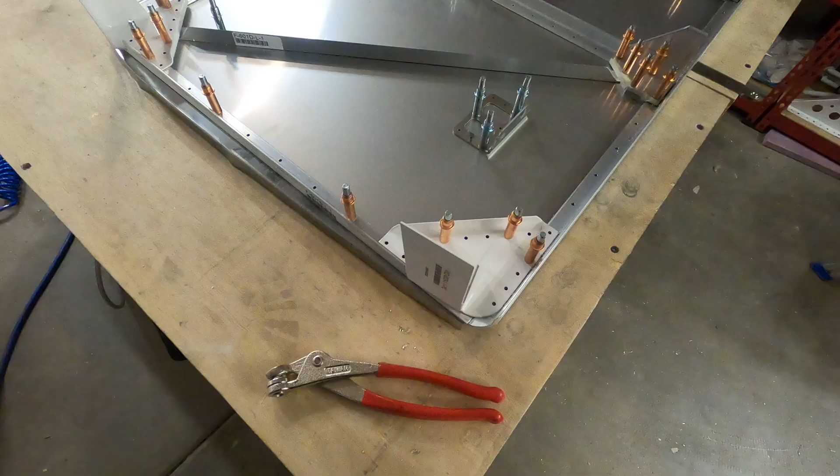All right, back to the Firewall. Let's see how far we can get on this thing. To start, disassembly, deburring, as always, and a lot of dimpling and countersinking.

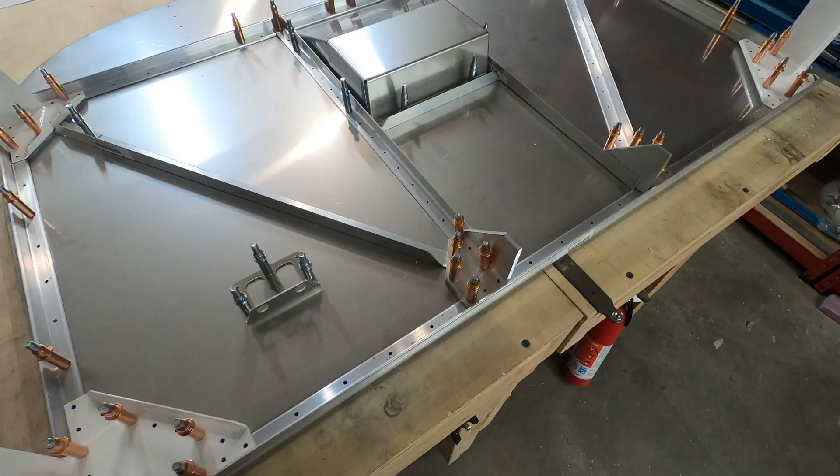Once that's done, we will get into the primer. Again, we're using that new white primer. I'm excited to get a little more experience with that. And once that's cured, all this goes back together and we start riveting. Let's do it.

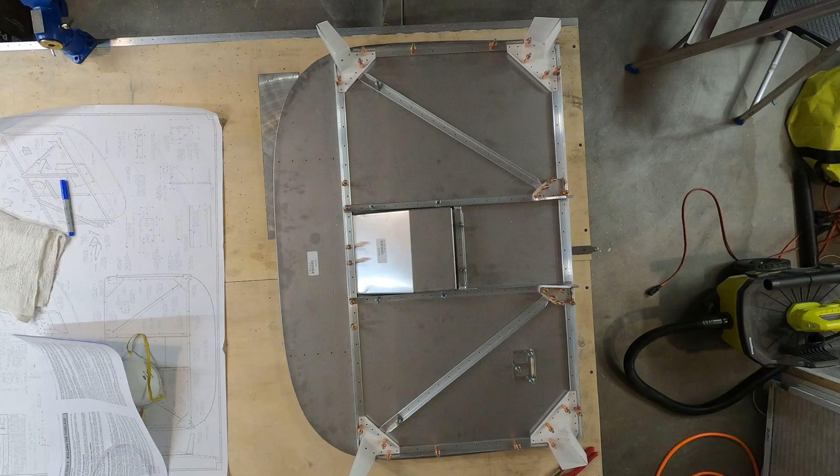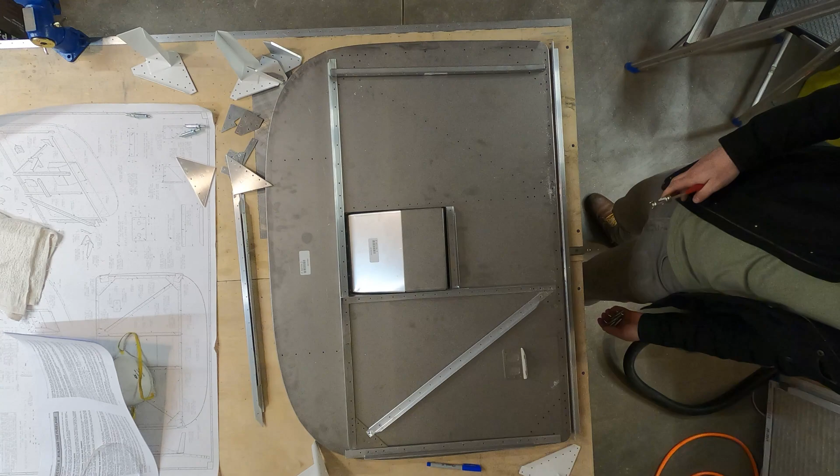I got the Firewall deburred just fine. It is steel, so a couple extra twists and a little extra pressure with that tool are necessary.

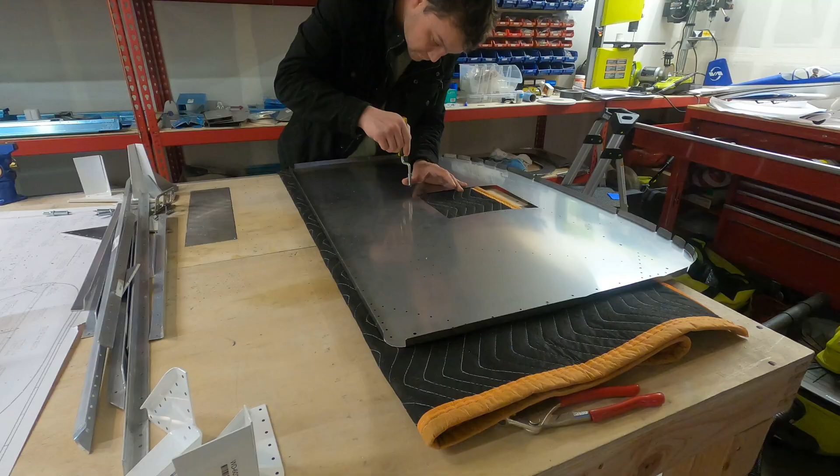And then from there, it's dimpling. Now, I'm really happy I took some time in between the wings and the fuselage to rebuild my dimpling bench. The added structure helps support some of the heavier pieces, which with a steel Firewall is really necessary. And then one of the things that I did on my original one, not knowing, is I put some legs out front, but the dimpler itself is designed to hang over a bench.

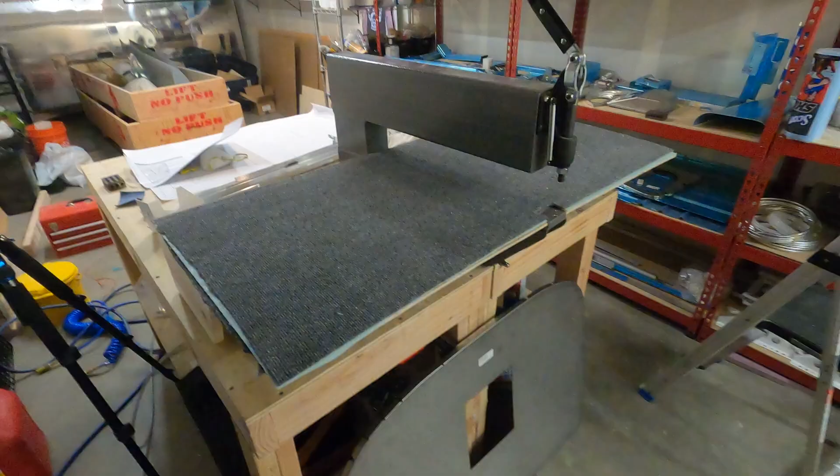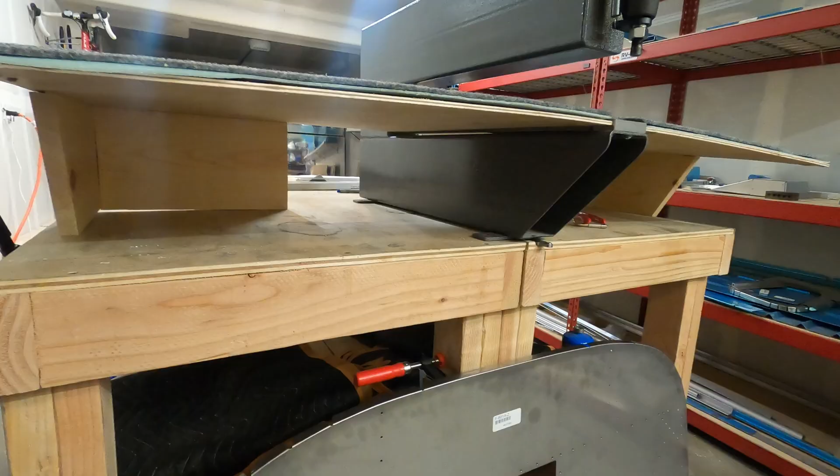So that you can get into parts that are folded, like trailing and leading edges. And so often those two front legs were just dangling off the edge of the table. So the new model is mainly supported from the back with an angled cut, allowing the front to kind of hang over along with the dimpler. It works wonders. I'm so happy I took some time to do that.

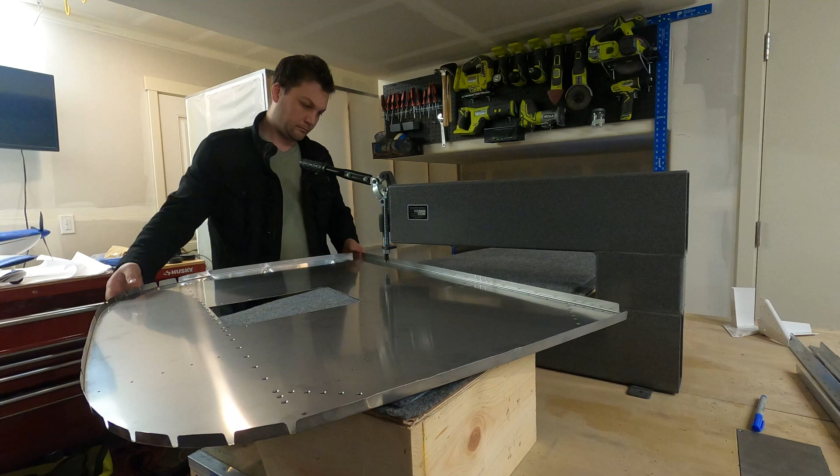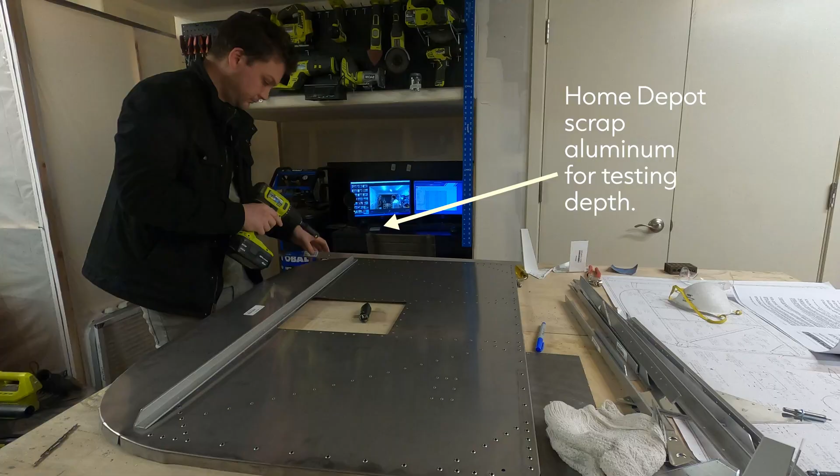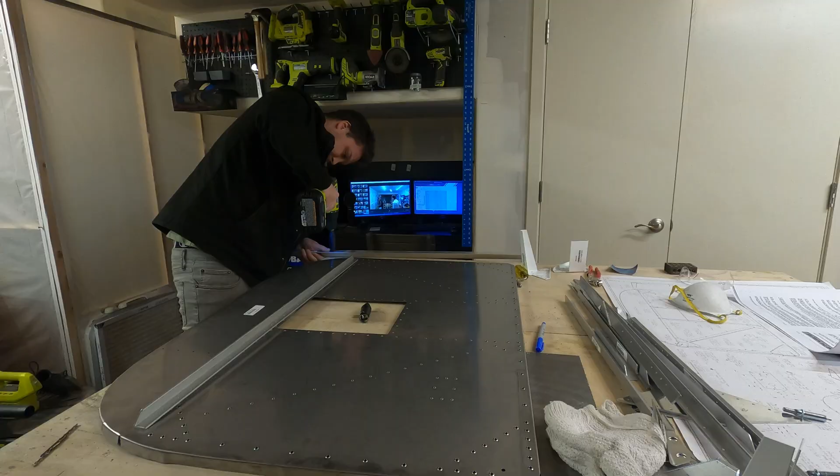Once dimpled, it's all countersinking. So I got my two countersink tools set up, the number 40 and the number 30. They're set for flush rivet depth, then 7 clicks deeper, and that's going to be perfect for nesting into the dimpled Firewall. So running the dimples, being careful that you're getting the dimple on the correct side of the part, all through the stiffeners, all through the doublers. And that's going to get everything right up to the point of deburring.

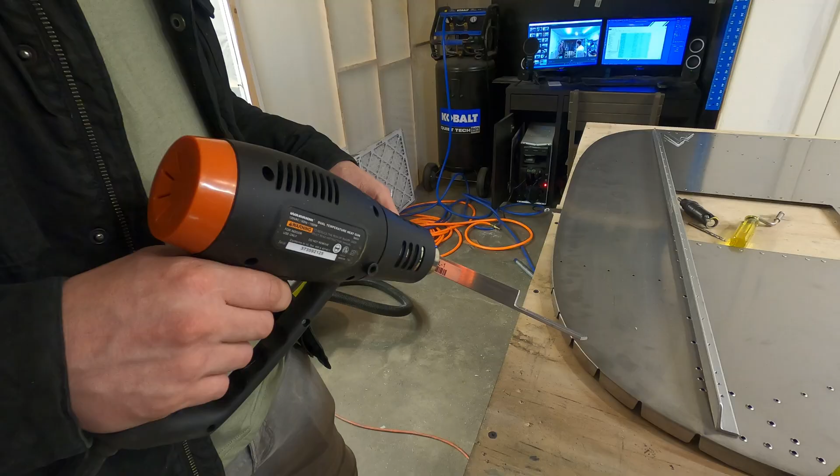So the heat gun trick works pretty well for getting these decals off. The heat gun trick is simply hit it with a heat gun until, I like to do it, until the heat activated paper turns the whole thing black, and then peel it off. It gets the decal, the part label off much easier than trying to pick at it and have it come off in a billion pieces.

These came out really cool. These are nice looking parts, and I'm proud of them.

Shooting the primer, I'm getting used to the stuff. I like it. I like how it comes out of the gun. I like how it applies. The drying time is going to be an issue, I can already tell. It has the potential to really log jam me in the primer booth. That's okay. I think with the fuselage, there's enough stuff that you can bounce around on. Hopefully, I'm not really ever waiting on parts to dry.

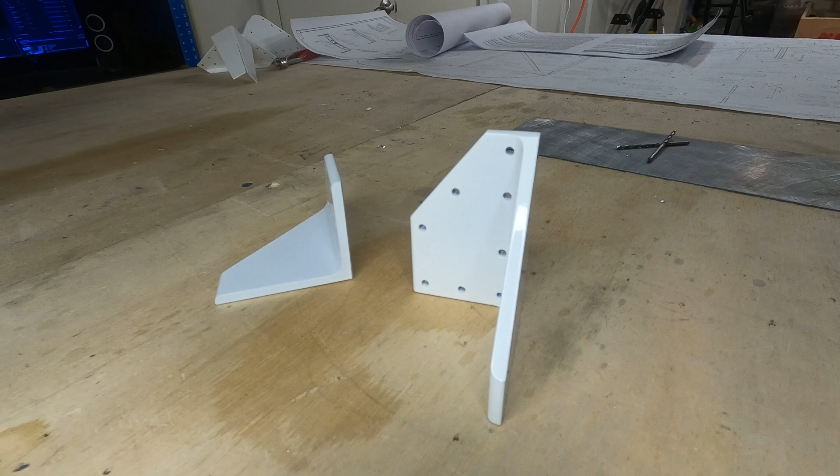The wait is long. The dry time is longer than I would like, but the finish is excellent. It's exactly what I want the interior of my plane to look like. I took a little extra care on those pieces that I was so proud of fabricating, making sure that they got a nice coat, 2 coats, and they came out just wonderful. It looks amazing. So I'll take the hit on having to slow down at points, and it'll definitely try my patience, but I really, really, really like the finish.

Now it's just rivet everything together. The instructions make it sound pretty easy, but I have a feeling it's going to take me a little while. Let's get started.

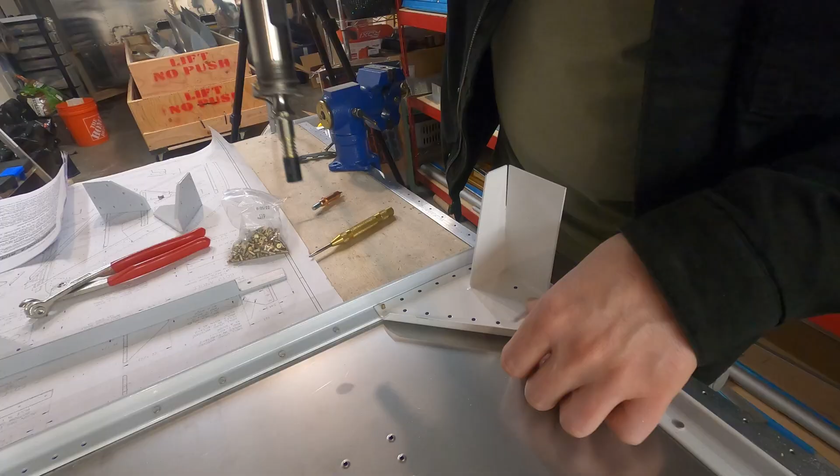So when I started the firewall riveting, I was all about back riveting. Even though I had read somewhere that it's much easier to buck them, I was like, nah, forget it. Bust out the back rivet plate, let's get it going. After about a dozen rivets, half of those having to be drilled out, I gave up on back riveting. I don't know why, it's just difficult, and the rivets have a tendency to sit high.

Once I started traditional bucking rivets, they sit flush on the firewall side. They look great on the other side. There's a couple angles that are hard to get to, but for the most part, just buck those rivets, man. Start with your 4s. They're a little bit difficult, but once you get in a rhythm, you bust through them. And then when you get to the 3s, it's just easy. It's a great way to finish up. Make sure you do whatever you have to do to remember not to set any rivets around the recess.

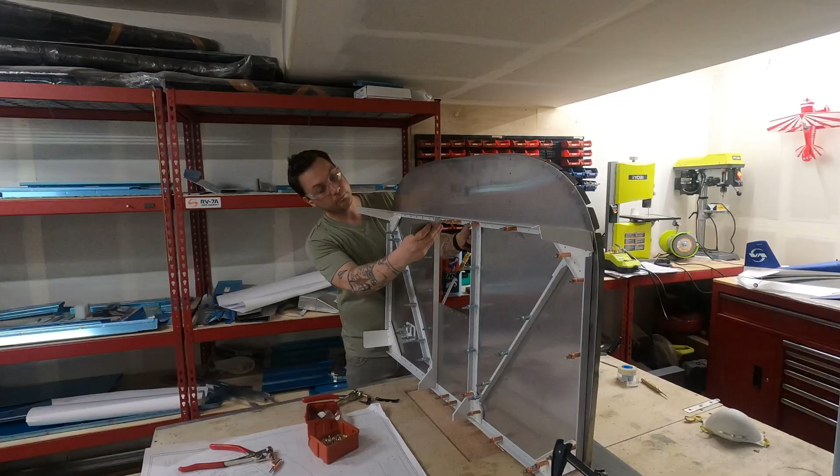This is why I always use the blue tape when I don't want to rivet something. I just caught myself having already set the top line of rivets where the recess goes. Those are all supposed to be left out until you rivet in the recess. So I had to drill out some rivets, but we're gonna keep plugging away.

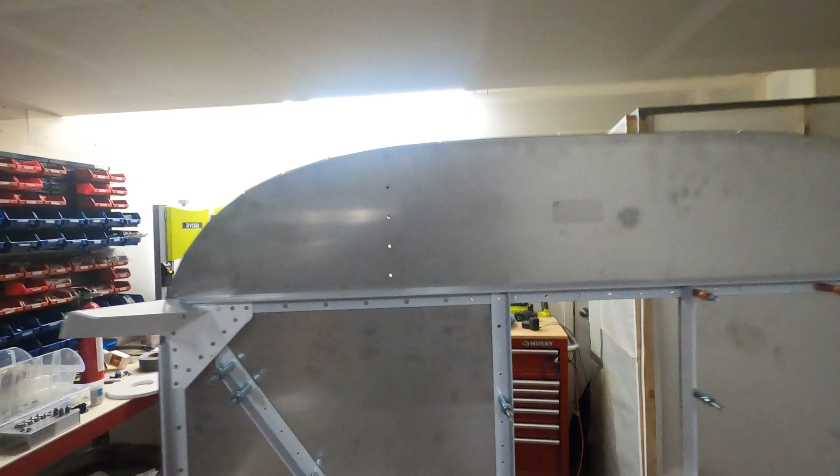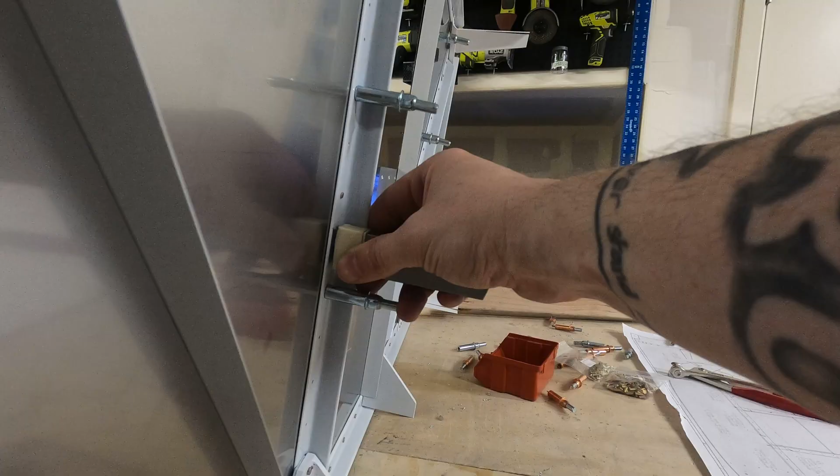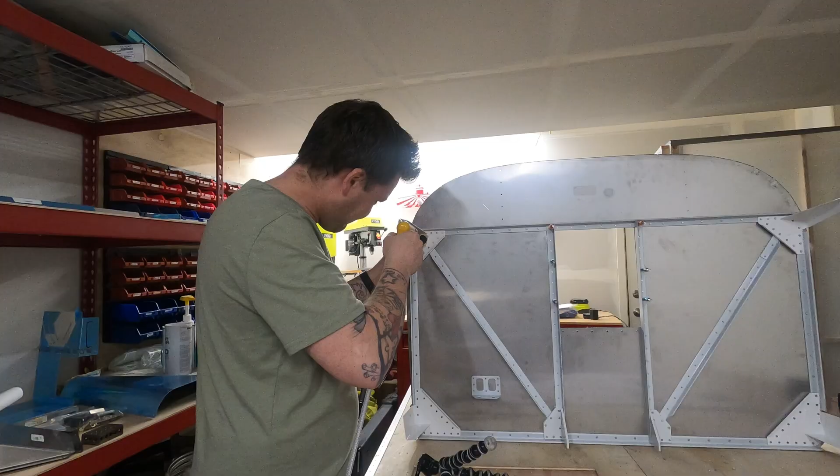The very last thing on the firewall for now is drilling 2 holes for the motor mount. There's already an existing hole in the bracket up front, and there's an existing hole in the firewall on the back. We're just trying to connect those two. If you don't hit it exactly perpendicular, you're not going to come through on that hole on the firewall.

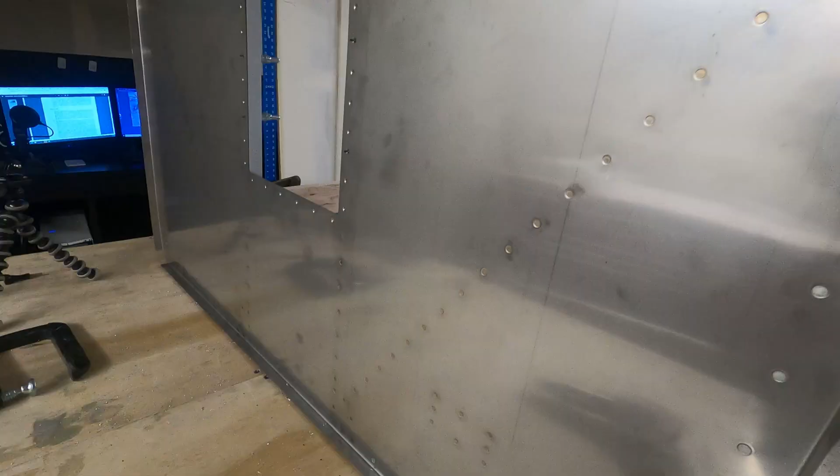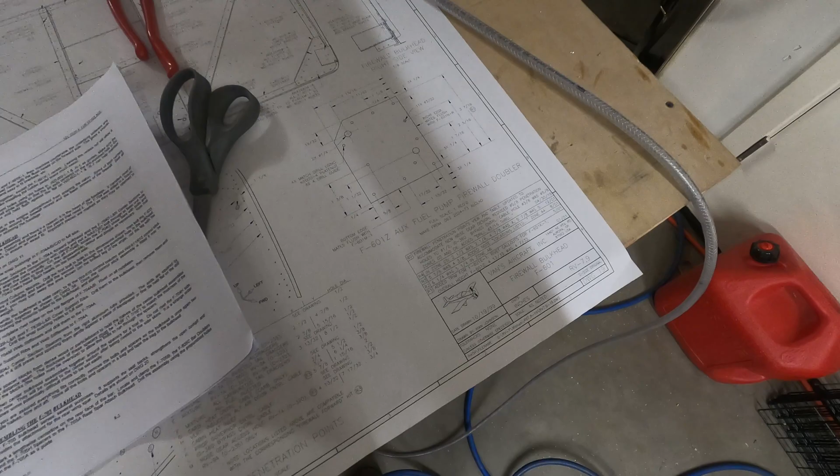You may be asking, what about that auxiliary fuel pump doubler, the piece that I couldn't find because I have to make it? Well, I was never too worried about that. The reason is, I don't think I'm gonna mount my auxiliary fuel pump to the firewall. There's quite a few very popular ones that get mounted between the left and right seat in the center console next to the fuel selector switch. In fact, I've sort of always known that that's where mine is going to live. So for now, no doubler on the firewall.

Well, I got the place cleaned up a little bit, and that didn't take long. What has taken a while is studying these parts. These are incredibly machined and likely very expensive pieces. So I'm taking some time to get myself acquainted with the parts, the instructions, and the upcoming steps.

So F-704 is like at the heart of it all. It's where the spar meets the cockpit. It's the former that joins basically everything that is the fuselage to everything that is the wings. It utilizes some of the cool gold anodized parts that came with the wing that I've been holding on to.

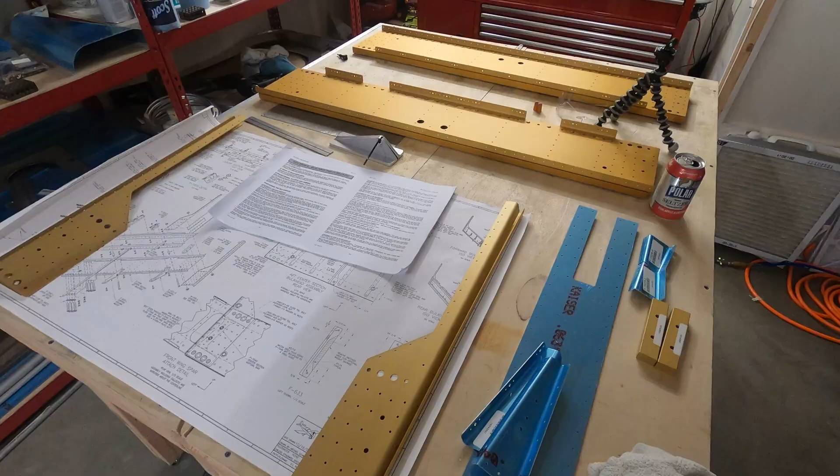The first step is to final drill some holes to size for snap bushings. Now, looking at it, I noticed that some are already drilled for you, but they're drilled larger than what they tell you to drill. It might be that Van's realized these holes need to be bigger, and it was easier for them just to drill them bigger themselves than it was to alter the plans and the instructions. I don't know. We're gonna get the rest drilled, fit in the snap bushings, and move forward.

Those to me were kind of the practice pieces, if you will. This next piece makes me incredibly nervous.

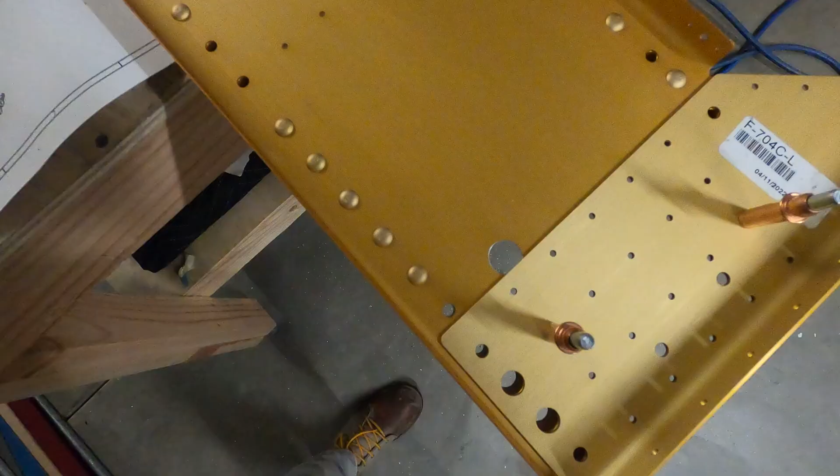The holes are in. That step drill makes quick work of those. I love that thing. The only thing is one of the 704 pieces sort of overlaps one of the holes I just drilled, and I don't know if I'm gonna have to scallop that edge in or not. I'm not sure. The instructions do mention you're gonna have to trim that bushing, but this is more than just trimming a bushing.

So bolting on the sides to the center spars, you want to put through one of those close tolerance bolts in order to align those pieces, and those are very aptly named. It's a snug fit. Once you get that in, it's all about these spar bars, and we have to align those themselves with some bolts, clamp them on, and then drill a hole through there as perpendicular as we can for some rivets.

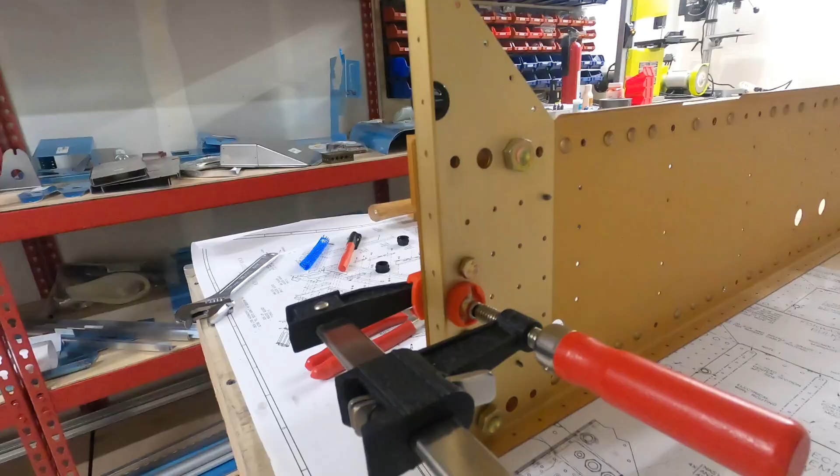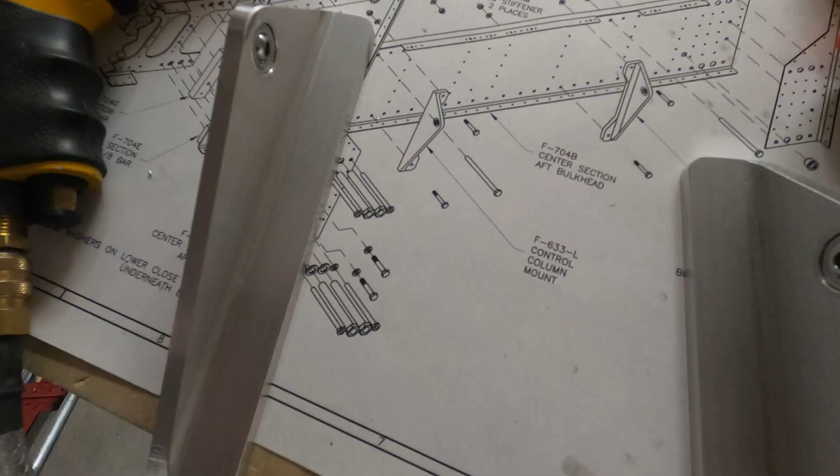So now it's time to bolt up the control column mounts. It looks pretty straightforward, but I think the labels got swapped on my mounts. Took me a while to do some research and see if in fact I have a left label on a right mount and vice versa. Once I got that straightened out, it's just drilling and bolting.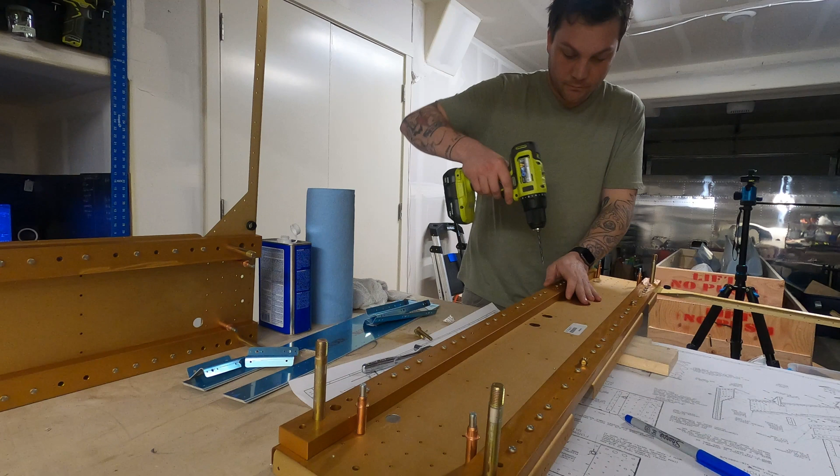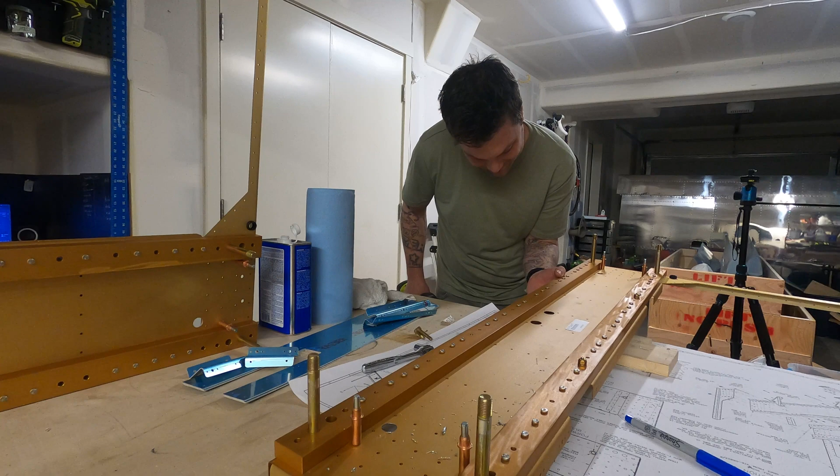I'm stuck staring at this thing, wondering if I want to remove the hatch portion for optional weight savings. I just don't know if the juice is worth the squeeze. It seems like a lot of work and maybe an ounce of weight, not sure. I guess I'll go ahead and do it. I kind of think of it as like extra credit, so I've always done the extra credit. Let's go ahead and remove it.

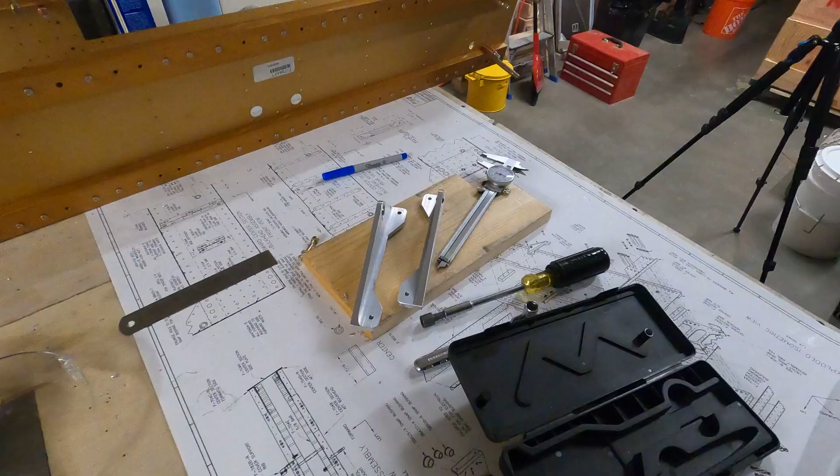Was it worth it? I don't know. I should have done it before and after. Instead I did them both at the same time. But I went ahead and weighed the parts that I cut off. We're just over an ounce, so let's round up for all the lost shavings and filings and whatnot. We'll call it 2 ounces. If that's not good for a couple hundred feet per minute of climb, I don't know what is. I will note they do look a little cooler, so there's that.

So I have here the control stick assembly, which is pretty freaking cool. This took a little work to get bolted together. It's just like other pieces of linkage where you have brass bushings that you want just barely longer than the steel sleeve that's attached to the weldment. And everything is just a little bit too long to fit. So I spent about an hour grinding and filing until we get some friction-free movement.

And then this is going to get bolted to those brackets I just made. Really the only thing I'm trying to do is mock it up to figure out how many washers on either side of those bearings I need. Because then everything's got to be disassembled because I want these primed.

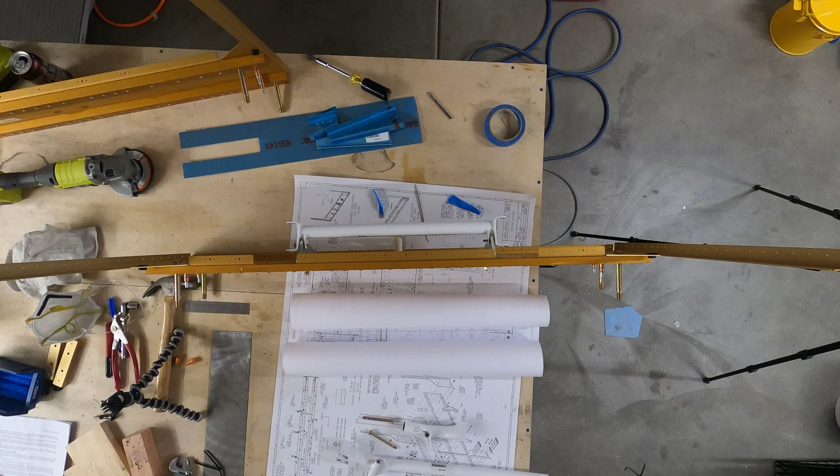So there's no play in this thing back and forth. It moves freely. And the control column pieces will fit in that, and those will get bolted on, and those move freely. So this whole little endeavor was really just trial fitting all of this.

Next up, it's something that I have a lot of experience doing. We need some nut plates and flanges. Hopefully this is a walk in the park.

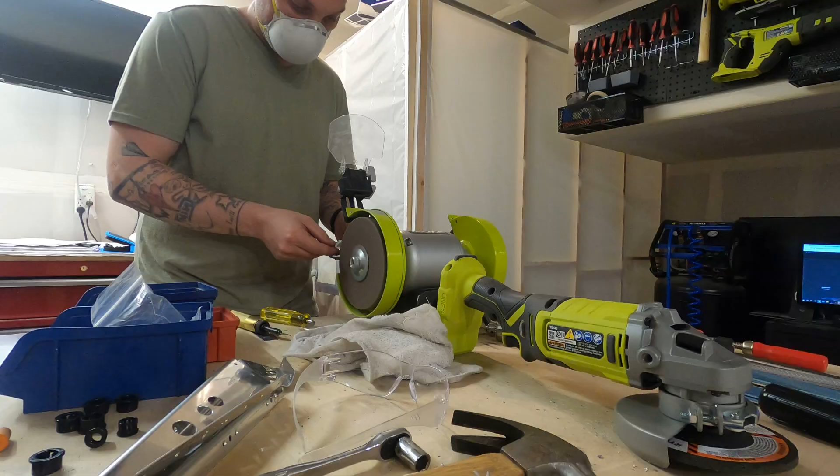So let's talk primer for a moment. The white primer I love - it's great, it looks fantastic, it's durable. I think it's going to be excellent on the interior of the plane. However, the dry time is an issue. At first I thought to myself, well, the entirety of the fuselage will just be primed in white. That way I'm not trying to figure out what's going to be visible and what's not, and what I have to mask if something extends from a white area to a green area. Just paint it all white. However, that dry time is hanging over my head.

For example, with multifaceted pieces like this that I'm going to have to shoot from numerous angles and give 2 coats, that means 2 more days before I can rivet anything related to these pieces or the other pieces I'm working on, and I don't want to do that. So I have decided that I'll still utilize some of the AKZO primer when pieces won't be visible. For example, these. It's doing exactly what I didn't want to do, which is going through plans and trying to figure out if something's going to be able to be seen in the future. But I think it's all I can really do if I want to keep this build moving along and don't want to be frustrated and wind up rushing primered pieces.

It may mean that some pieces are even white on one side and green on the other. I don't really know exactly how it's going to play out as we move forward. I do know this: these won't be seen, and today they're going to be green.

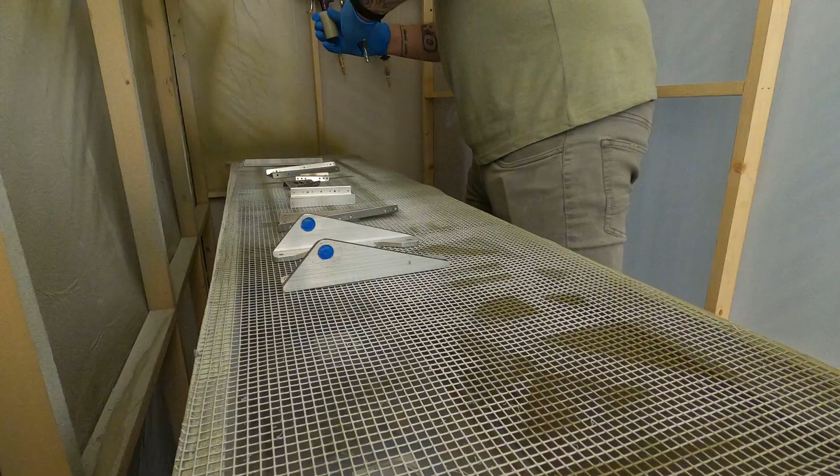First up, we're going to put nut plates on these reinforcement ribs. Now, Vans calls for a 4.5, far too long. I'm going with 3.5.

Now, with that piece clecoed here onto the spar as a guide, we'll countersink the forward-facing holes. That piece is acting as a guide for the pilot here.

Now, while you're all set up to do it, you might as well get the nut plates on your ribs here as well.

So the web stiffener gets riveted to the back side of the forward 704 bulkhead with flush rivets that face forward. Flush heads go on the forward side so that the cover brace can then be attached over those flush rivets with number 8 screws. Once that's all together, you can move to the inner cover braces. Those are attached with universal head rivets, and it's pretty straightforward.

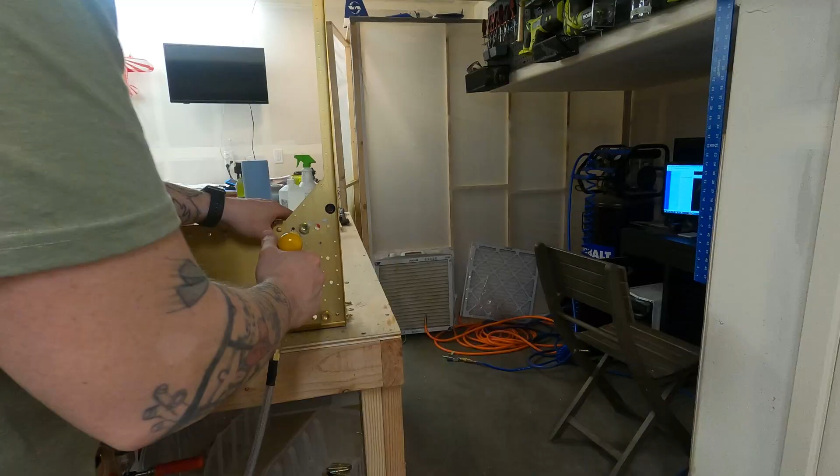Now that those pieces are on, I'm going to attach the former sides to the bulkhead, and this entire contraption can then be bolted together to take a look at it, and then we'll set it aside. I didn't do a great job of noting this in the video, but keep in mind one thing: there are 2 pieces that look incredibly similar - the forward 704 bulkhead and the aft 704 bulkhead.

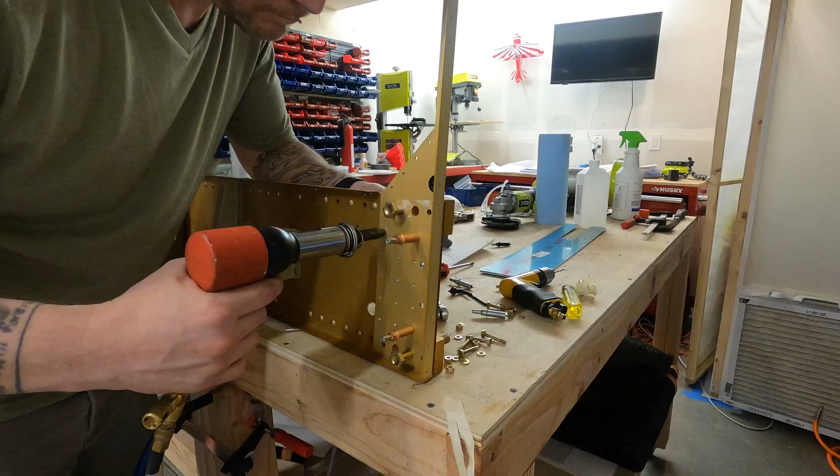I'm working on the forward, where these hatch covers are attached. On the aft side is where the control column mounts were attached. Later, we'll also attach those gold anodized spacer blocks to the aft 704 bulkhead.

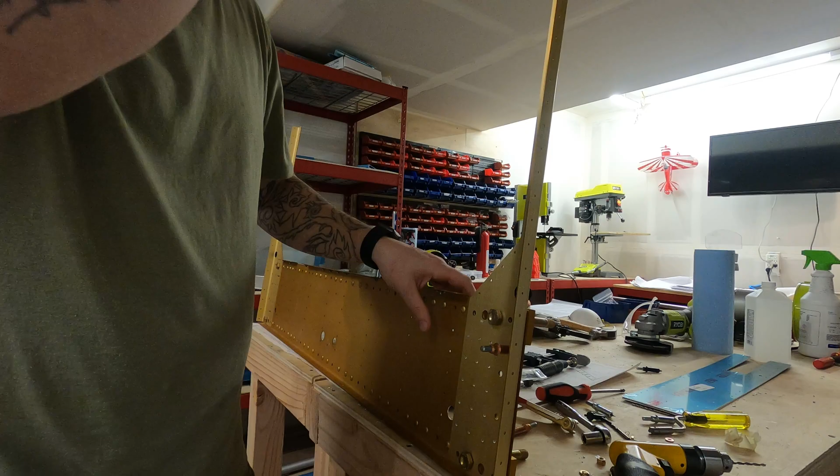So the last rivets to buck on these were these long sons of guns that are over 1 inch long, and they're there to hold on the spacers. They're countersunk on the forward end, or I should say the rivets are flush on the forward side. The spacers are countersunk, and these big rivets go all the way through the spacers, and then you put the shop head on the back side of the bulkhead.

That shop head doesn't get fully formed. There's so much room within that hole for that rivet to compress that you don't get a full shop head, at least not according to any rivet gauge I've ever seen. Now, I looked it up - that's normal. It's something to be expected with this part.

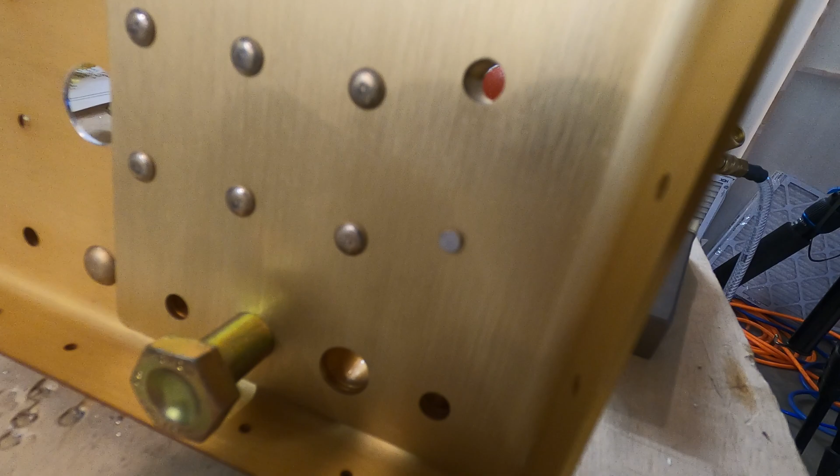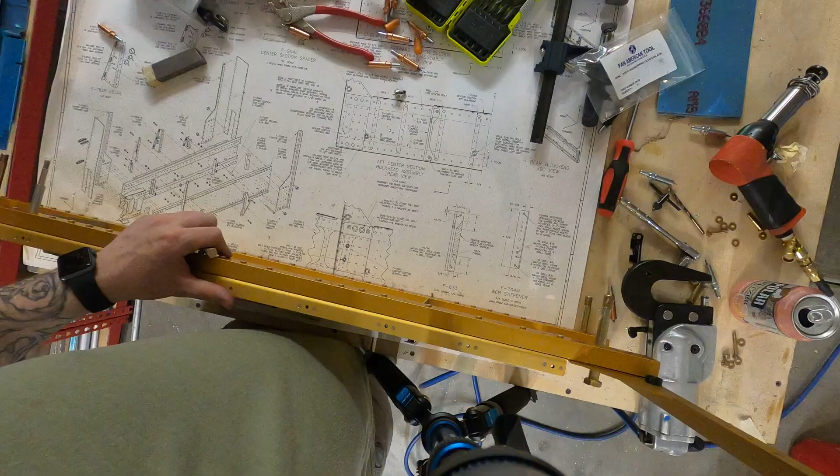Alright, so a couple episodes ago I droned on and on about some aluminum tubing, and we had various lengths, and there was one particular length that we had to use to cut spacers for the ailerons. The others were to be used elsewhere in the plane. We're going to use some of it now.

These are pre-cut spacers that hopefully you didn't use on your ailerons. They're going to be utilized as spacers between the fore and aft 704 bulkhead.

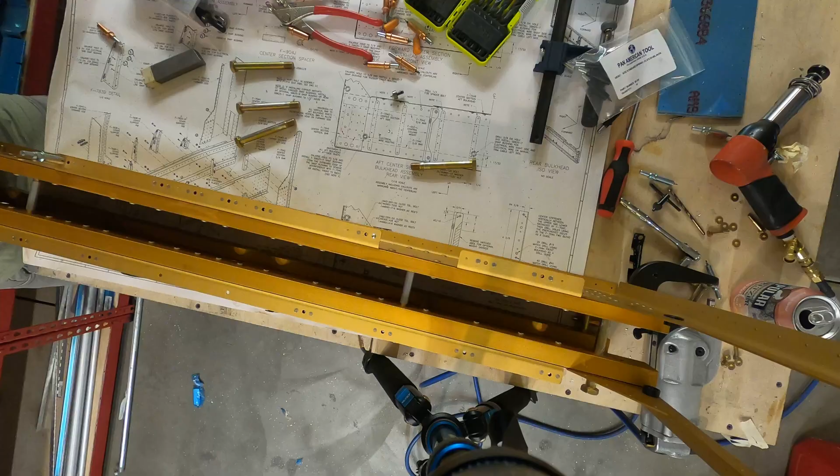And that's it. I'd like to say it's done. It's done for now, like everything else in this plane. We'll come back to it, I'm sure. I gotta get this place cleaned up, so we're gonna call this one for now.